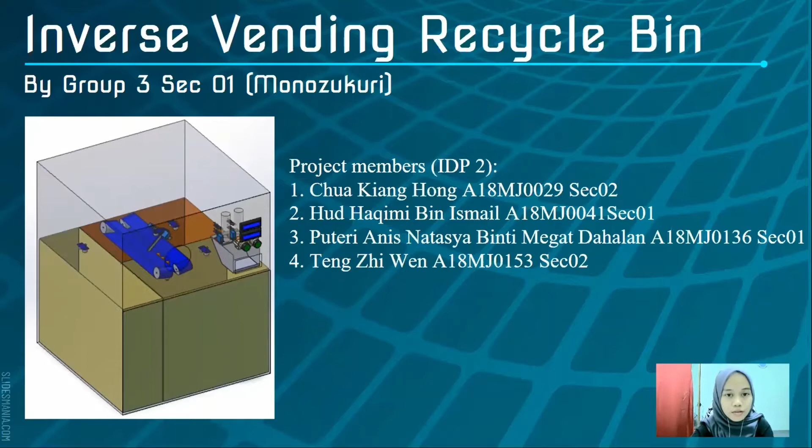First of all, our concept is a reverse vending machine. This is a machine where people can return empty beverage containers like bottles and cans for recycling, and get a deposit, refund or reward amount in return. The user puts a product in and gets out the monetary value. Our project only accepts the right type of materials.

It prevents misuse of recycling bins with a built-in waste segregation recognition system. The machine accepts plastic bottles, aluminium tins and glass bottles from users. Next, our machine comes with a reward system where users can earn money through recycling according to the amount of solid waste given. Lastly, we use a Blynk application to inform the person in charge when there are operational problems, such as the recycle bins being full or the coin machine running out of coins. This is what we call the self-monitoring system.

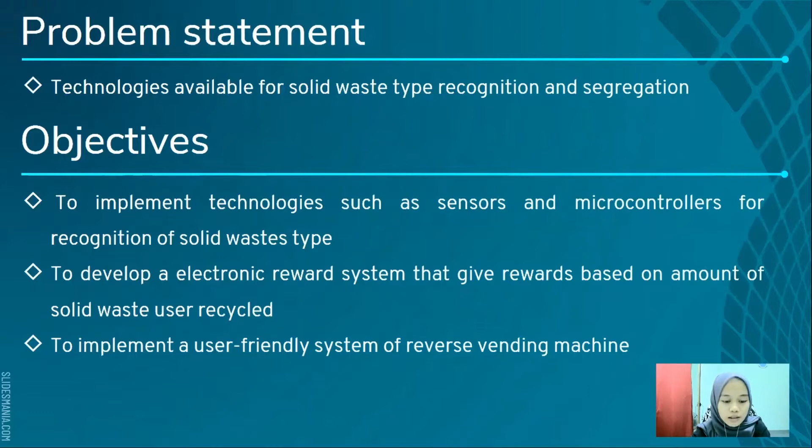Now we go to the problem statement. The problems need to be solved in this project in order to increase the recycling rate of solid waste in Malaysia. We figured out the suitable technology, which is the recognition and segregation system, used to separate solid waste for ease of the recycling process. The objective of our project is to implement technology such as sensors and a microcontroller in the reverse vending machine to recognize the type of solid waste and process it. Then, the project aims to develop an electronic reward system that gives rewards based on the amount of solid waste the user has recycled. Lastly, to implement a user-friendly reverse vending machine system.

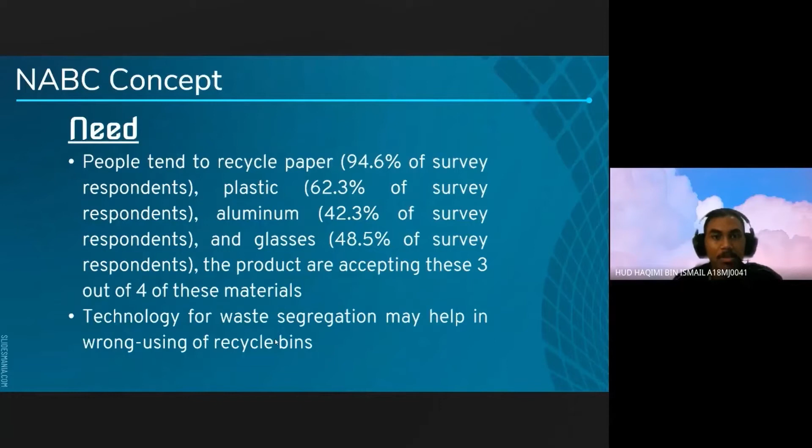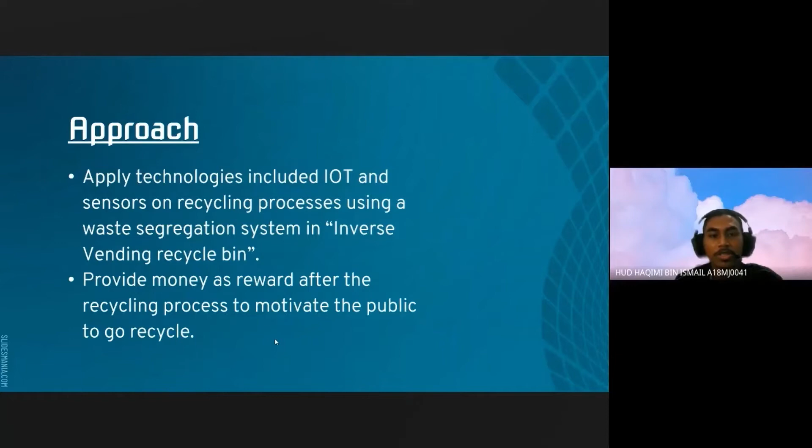For the approach, we apply technologies such as IoT and sensors to the recycling operation, utilizing a waste segregation system for plastic, glass, and metal recycling, as well as a self-monitoring system in the reverse vending and recycle bins. This will encourage people to recycle and give them money as a reward when they have completed the procedure.

For the benefits, it gathers glass in addition to plastic bottles and aluminum cans, which some other products do not. Compared to other products that use a receipt printing system, we use coins as a reward, which is more environmentally beneficial. When the recycle bins are full, the person in charge is notified, preventing overloaded bins. Notification is also sent when the number of coins remaining in the machine decreases, as a reminder to refill coins. This ensures the machine continues to function properly. Also, because sorting and separating solid trash is done by the machine, labor costs are reduced.

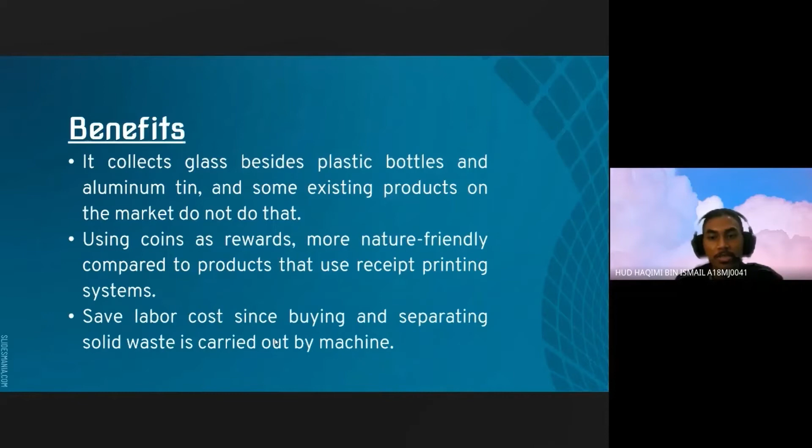For the competitive part, currently there are many types of reverse vending machine products on the market. One available commercial product is Recycle N Save, based in Singapore, which collects recycled plastic drink bottles and aluminum drink cans. Another available product is the DRB1000, a reverse vending machine based in Japan designed to accept non-refillable PET type plastic bottles and cans. Our project has an advantage compared to Recycle N Save and DRB1000 because it also collects glass bottles, which are not accepted by those commercial products. Besides that, our product uses coins as a reward for users instead of receipts or coupons, making it more environmentally friendly compared to commercial products.

Thank you. Good morning everyone, I am Chua and I will present about the design of our project prototype.

We have a coin dispenser system in the machine that dispenses coins to the user as a reward for recycling. On the machine there will be two LCD screens: one showing the material detected by the system, and one showing the reward accumulated by the user. We have two buttons: a stop button that the user can use to check out the reward accumulated after the recycling process, and a start button used to submit material to the machine.

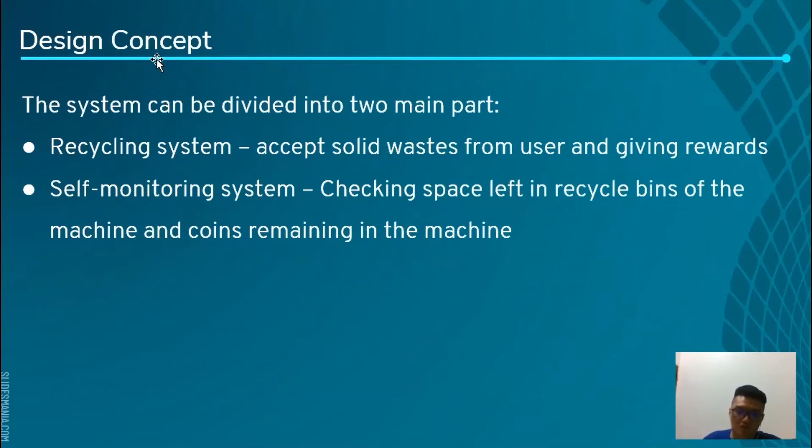The system of our project can be divided into two main parts. One is the recycling system that accepts solid waste from the user and gives rewards to the user. The other is the self-monitoring system that checks the space in the recycle bin of the machine and the coins remaining in the machine. First, we will talk about the recycling system.

The recycling system will detect the type of solid waste material inserted by the user based on the reading of the sensors in the system. After the user presses the start button, the solid waste will be sent into the respective recycle bin and rewards will be accumulated in the system. The user can accumulate more rewards by inserting more materials into the machine one by one, and check out all the rewards accumulated by pressing the stop button.

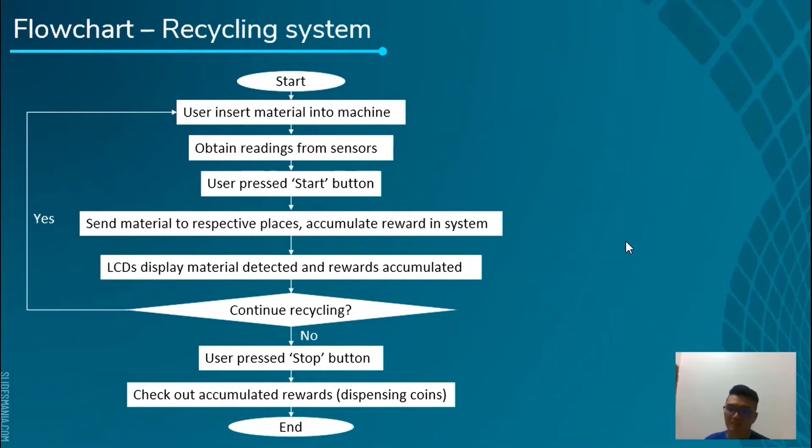For the recycling system, we are using an Arduino Mega board as the processor. There will be infrared sensors, inductive proximity sensors, and capacitive proximity sensors for solid waste recognition. The user can control the process using push buttons, and materials detected along with rewards accumulated will be displayed on the LCD screen. Solid waste will be sent into the recycle bin by servo motors and a DC motor controlled by an L298N motor driver. Lastly, the reward for the user will consist of 10 cent and 20 cent coins, dispensed by servo motors.

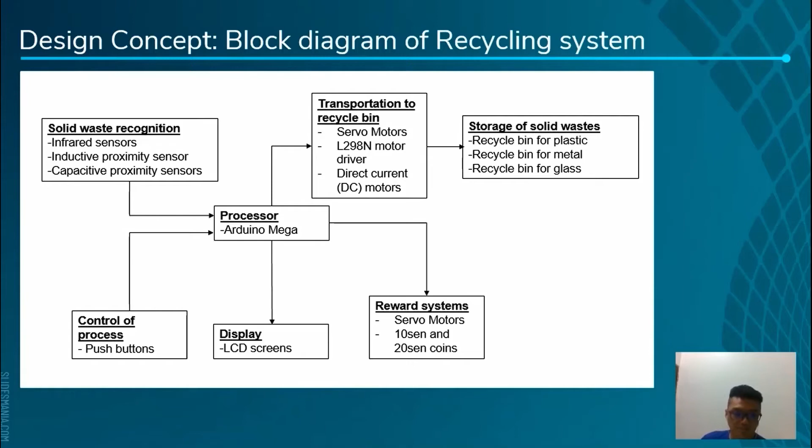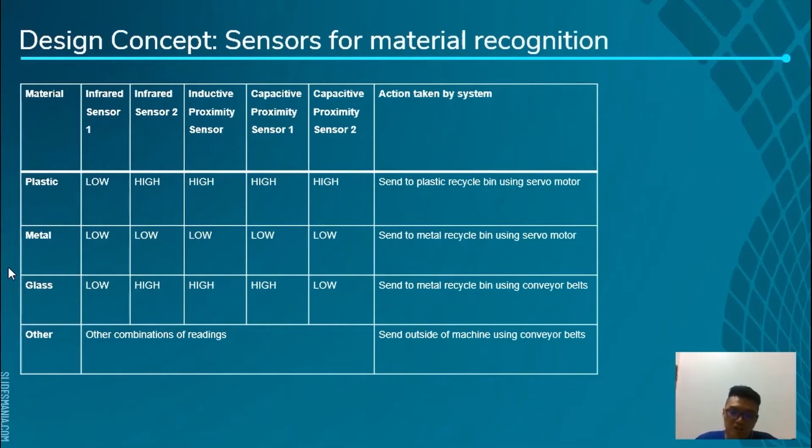Because of the limit of the video length, I will not explain the details about the sensors for material recognition. But for plastic, metal, and glass inserted into the machine, we do have unique sensor readings for them. Material that causes combinations of sensor readings other than plastic, metal, or glass will be rejected by the machine, as shown in this table.

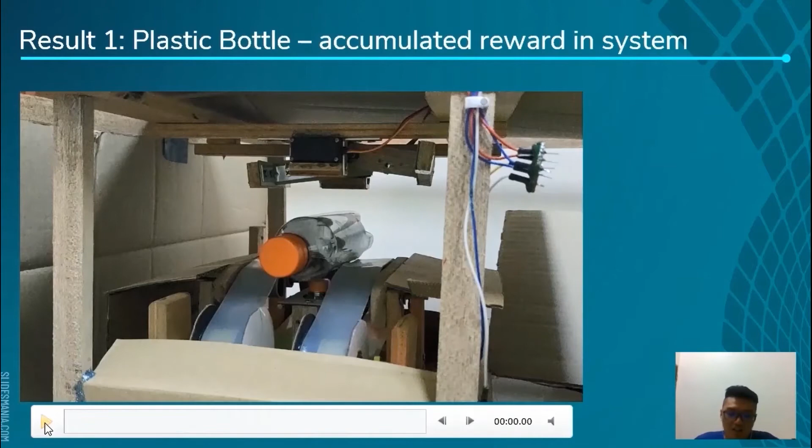For our system, the reward for each plastic bottle recycled will be 0.7 cents. This value is for demo purposes only and can be modified in the coding for our system.

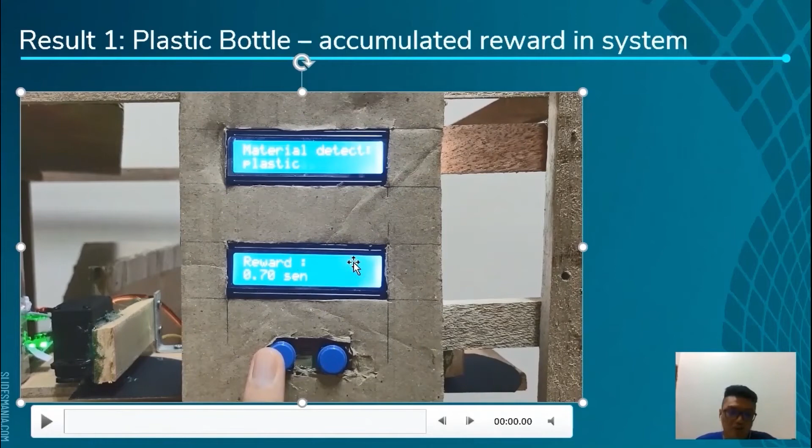This video will demonstrate a reward of 0.7 cents accumulated in the system after a plastic bottle is sent into the machine, as shown on the LCD below. This video will demonstrate how a plastic bottle is sent into the recycle bin by the servo motor.

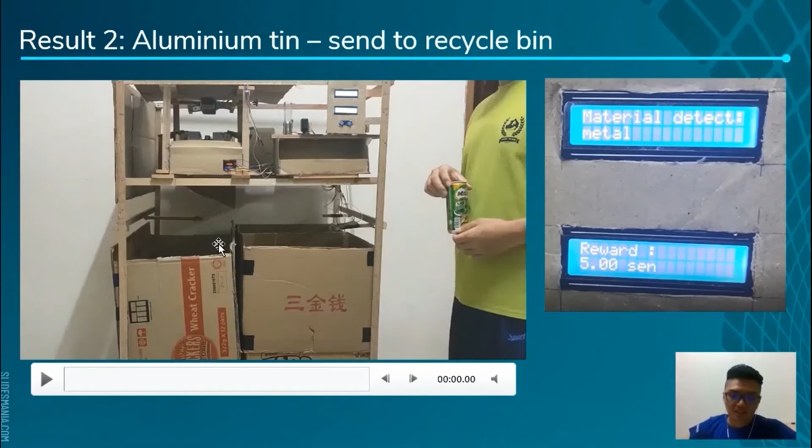This video will show how an aluminum tin is sent into the recycle bin, and after the aluminum tin has been sent into the recycle bin, there will be 5 cents of reward accumulated in the system, as shown in the picture beside the video here.

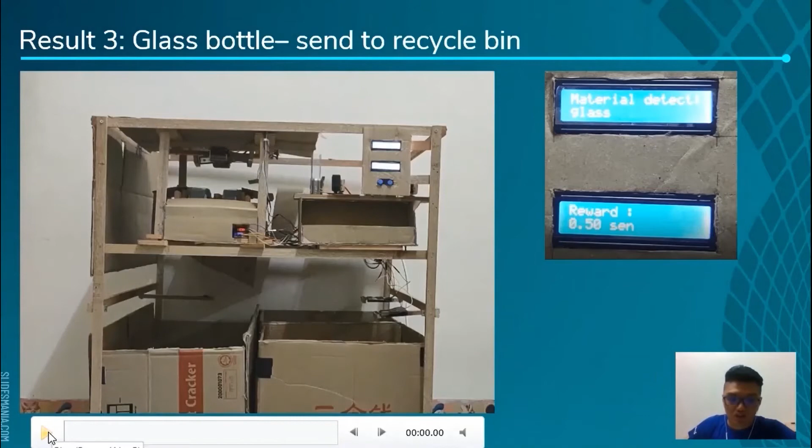This video will show how a glass bottle will be sent to the recycle bin, and a reward of 0.5 cents will be accumulated in the system after the glass bottle has been sent into the recycle bin.

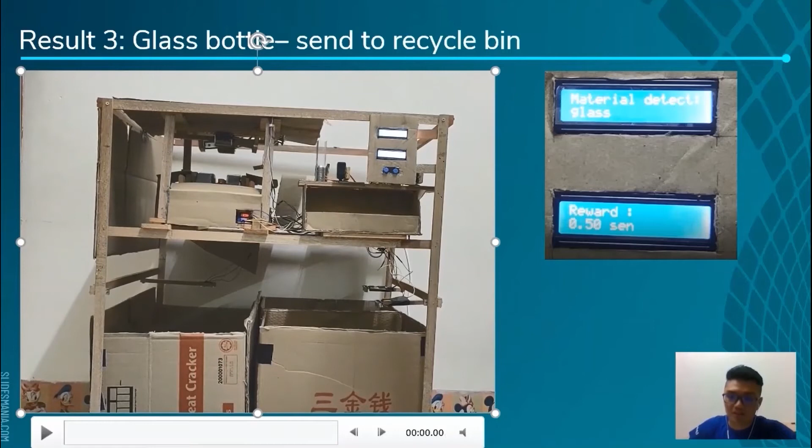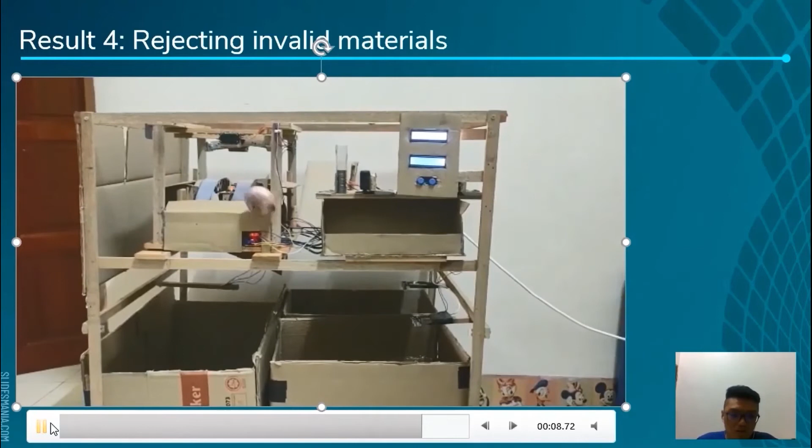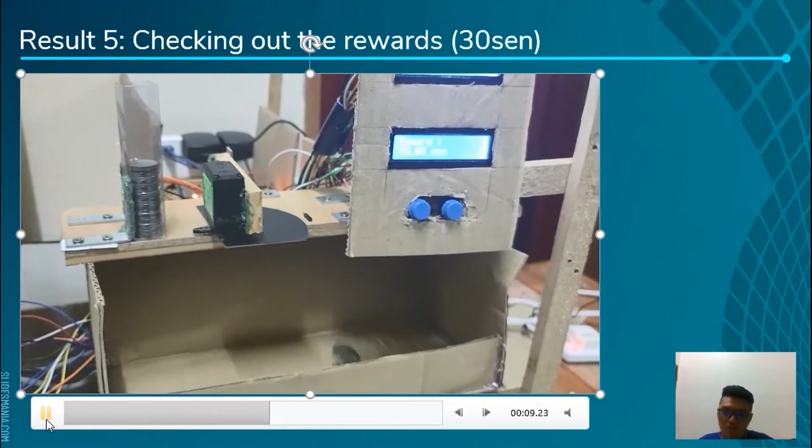This video will demonstrate how the user can get a reward of 30 cents after recycling the materials. 10 cent coins and 20 cent coins will be dispensed by the machine as a reward for recycling after the user presses the stop button. And that's all for the recycling system.

The next part will be the self-monitoring system of our machine. This system will check whether the recycle bin is almost full or whether the 10 cent or 20 cent coins remaining in the machine have become less. If the coins remaining have become less, or there is not much space left in the recycle bin, a notification will be sent to the person in charge. If no action is taken by the person in charge, the system will stop operating when the recycle bin is full or there are no more coins remaining in the machine.

For the self-monitoring system, same as before, we are using Arduino Mega as the processor. For internet connection, we are using an ESP32 development board, and we are using Blynk app to send notifications to the person in charge. For coin detection in the machine, we are using an infrared sensor, and we are using an ultrasonic sensor to detect the space left in the recycle bins.

So for the ultrasonic sensor for detecting the space left in the recycle bins, the sensor will be placed 4 cm above the recycle bins, and the height of the recycle bins will be 40 cm. If the recycle bin is 70% full, or only 30% of space remaining, the distance between the sensor and the waste will be less than 16 cm, and a notification will be sent to the person in charge.

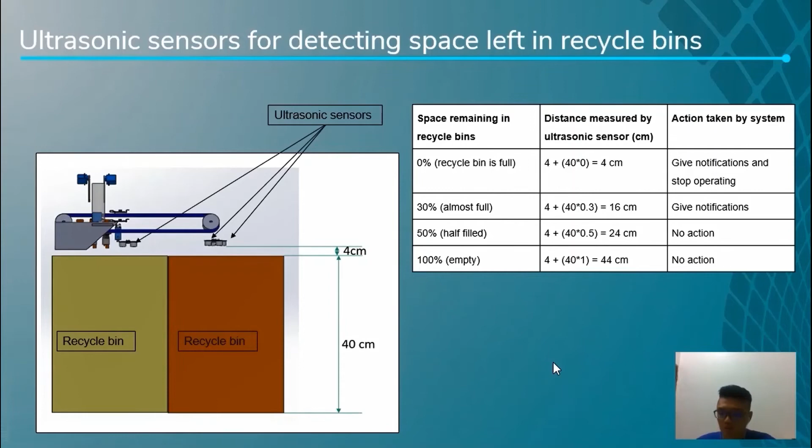So this video will show a notification sent to the person in charge when a plastic bottle is detected at a distance less than 16 cm from the ultrasonic sensor. We are assuming that the recycle bin is 70% full, so the distance between the sensor and plastic bottle is less than 16 cm.

Now we will assume that the recycle bin is full, so the distance between the sensor and the plastic bottle is less than 4 cm, and a notification will be sent to the person in charge. The difference with the result just now is the machine will stop operating, as shown on the LCD screen here.

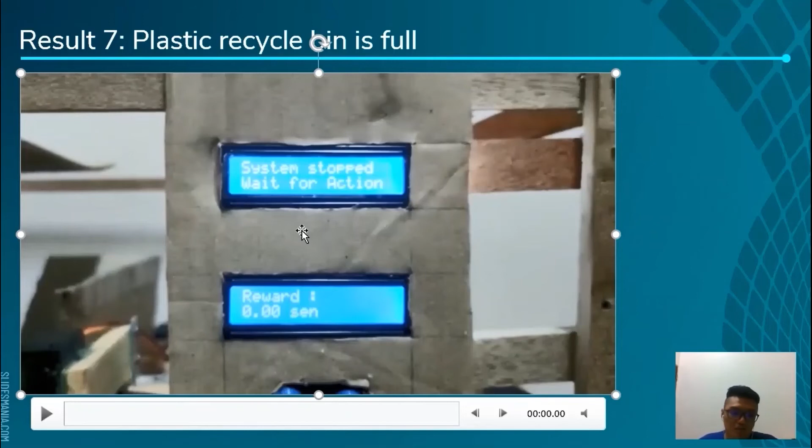We actually do have recycle bins for aluminum tin and glass bottles, but to save time I will just demonstrate for the recycle bin for plastic bottles. The concept is the same for the other two recycle bins.

Next, in this project we are using a plastic cone to hold coins in the machine, and an infrared sensor to detect the presence of coins in the machine. To save time, I will just demonstrate for 10-cent coins, and the concept is the same for 20-cent coins.

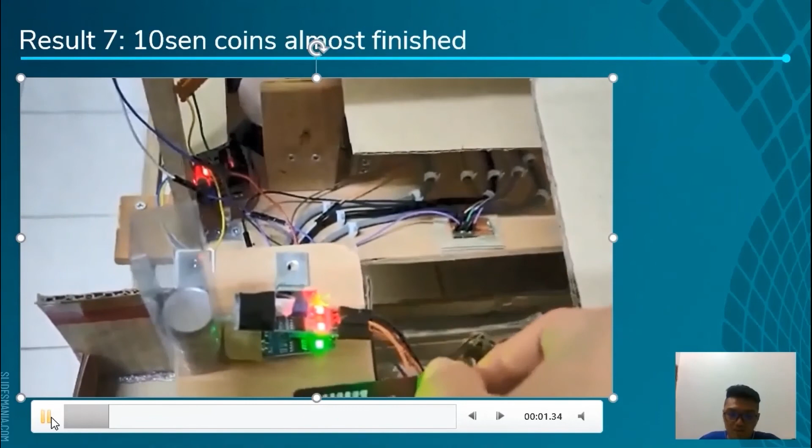This video will show the notification sent to the person in charge when the 10-cent coins in the machine are considered almost finished, when the infrared sensor points to the middle of the cone. The infrared sensor with the red LED here cannot detect the presence of the coins. So I will manually discharge the coins in the machine to a lower level so that the infrared sensor cannot detect the coins, and a notification will be sent to the person in charge.

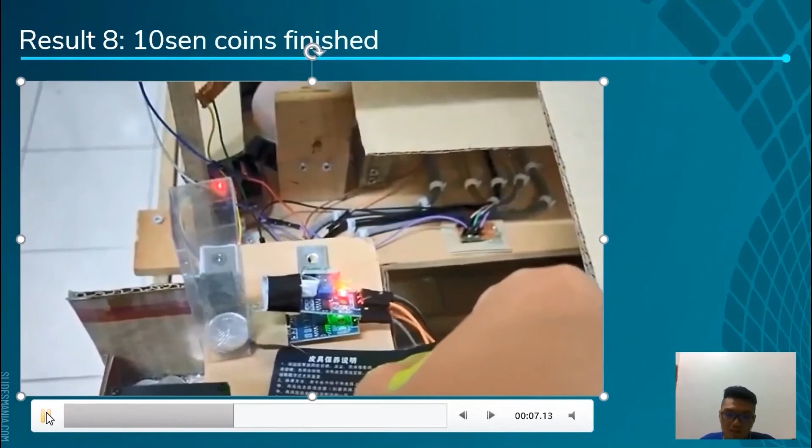Next, I will dispense the coins until it is very close to being finished. A notification will be sent to the person in charge, and the system will stop operating, because the coins remaining in the system may not be enough to be rewards for users, so the system must stop operating.

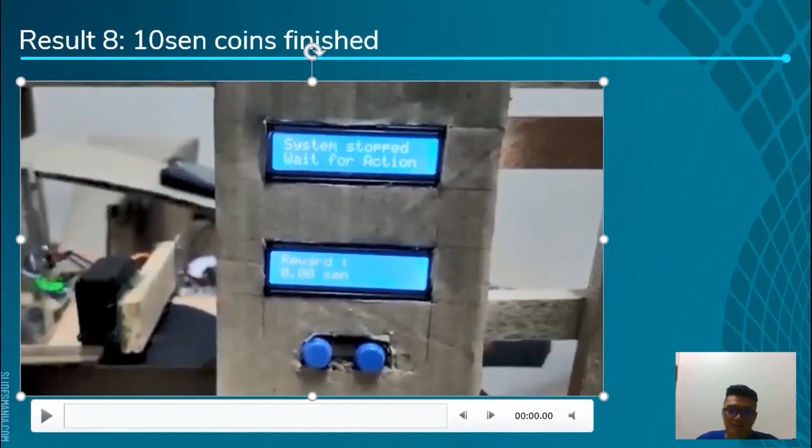Thank you, Chua. So now I'll be presenting the sources of error.

The first error will be that sensor readings for different types of materials are not 100% accurate. For example, the infrared sensor that should not detect transparent materials such as plastic and glass may give some wrong output because the surface of the material is not smooth enough to have a lower reflection rate of infrared light.

The second error will be that ultrasonic sensors used to detect the space left in the recycle bin are also not 100% accurate. It may have some error due to the different angle of ultrasonic wave reflection by solid waste, because the solid waste may have some random position in the recycle bins.

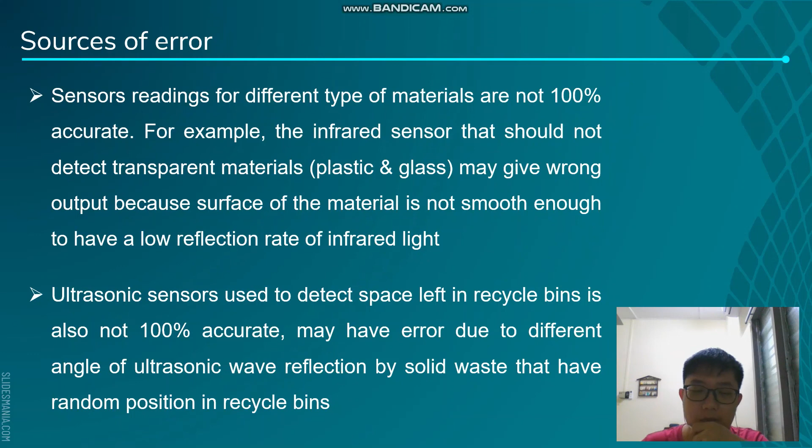These errors can be solved by potential solutions. The first one can be solved by applying artificial intelligence technology such as convolutional neural networks (CNN), which have an image classification function, to have a better result of solid waste recognition.

The second error can be solved by using more ultrasonic sensors to detect the space left in the recycle bins. If the noise and measurement errors from the sensors are independent and have zero mean, then multiple sensors will improve the results, since errors tend to cancel out each other as the number of sensors increases.

So for the conclusion, our aims for this project have been achieved. The microcontroller, or Arduino, and sensors have been implemented, which is an IoT-based project. A user-friendly reward system that gives rewards based on the amount of solid waste the user recycled has also been developed.

As for our future scope, this includes applying more advanced sensors or AI technology for better accuracy of solid waste recognition and a smarter system.